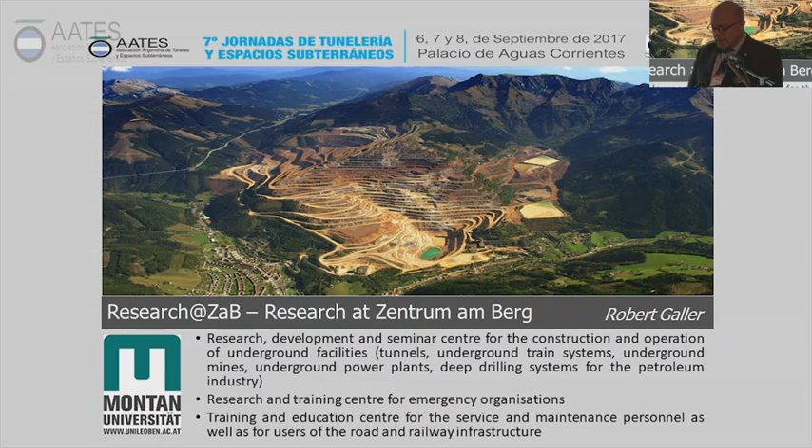But it is also a training and service center for people who are doing maintenance afterwards in tunnels, because we are also missing a device like this one. So what is the situation actually? Normally we get samples from core drillings. We try to do our best with the normal laboratory tests, UCS tests, shear tests, all the tests which we need for static calculations for designing the tunnel.

Yesterday we spoke about one step ahead, online chemical analysis for environmentally friendly tunneling, and so on is coming up. So this can be done in a laboratory, but it would be better if we could do all of that in a big scale in a real tunnel.

So the layout of this test gallery is like you see here. We have tunnels which have a length of about 400 to 500 meters, are double tubes, and get cross passages like in a real tunnel for the railway and also for the motorway. The red one is the motorway tunnel and the blue one is the railway tunnel.

What we learned, by the way, is we did some tests with our students and asked them, okay, you have an emergency now, what do you do? Because we saw some videos of how people behave in case of a real accident. And what we learned is, in case of a catastrophe, people react completely differently and most of the time wrongly.

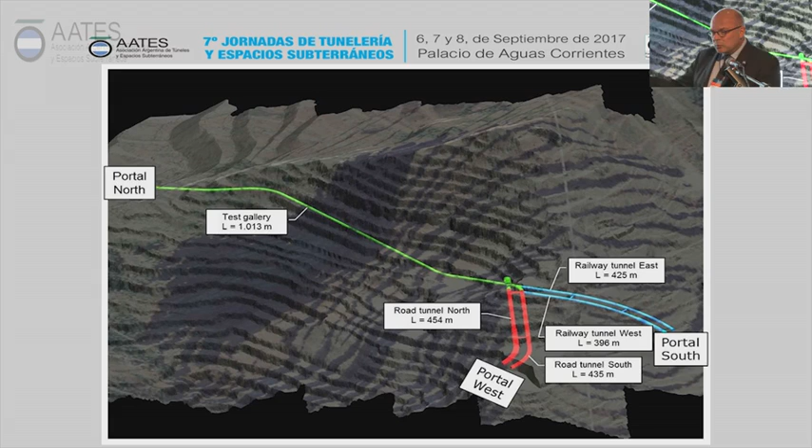Just some more detail. For this reason, we will bring the full inner lining, how it is, for a certain length on the left-hand side in the motorway tunnel, but also in the railway tunnel, so that you have the real feeling you are in a real tunnel, and what do you do then? The rest of the tunnels will be, let's say, single-lined, because we would like to do fire tests there. We would like to do material development there, all kinds of research, which I will show a little bit later.

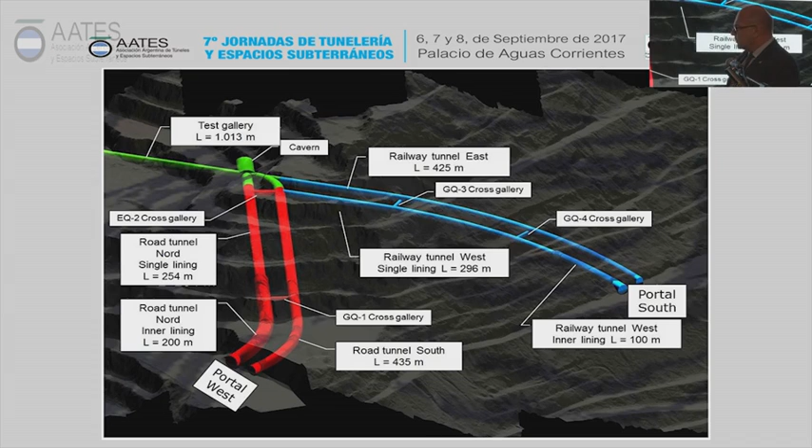So our big goal is to transfer the knowledge from the laboratory, which is, I would say, state of the art. How do we transfer this knowledge from the laboratory, what we normally got when I was a design consultant, to the big scale tunnel? Truly spoken, all of you, I think, do numerical calculations. How sure are you that your numerical calculations fit the reality?

Are there any material models for rocks available already which meet the reality? I already mentioned Mohr-Coulomb, Hoek-Brown, for London clay, Cam clay, whatever. But do these material laws meet the reality? We are far away from mechanical engineering, and we have to do a lot of research in that regard to meet the reality much more.

Following Rabcewicz's idea, having thousands of measurement results once available, then we can start to calculate tunnels. What we do before is rough estimations. I like to say 50% of what comes out of a calculation is the truth. The rest has to be found out on site by monitoring, geotechnical monitoring. And this is another point which has to be developed.

I mean, what do we do? We mount some reflectors nowadays on the lining. And then we have some distances between these measurement cross sections, and what happens in between, all of it is a guess. So we would like to get better also in that field with this training center.

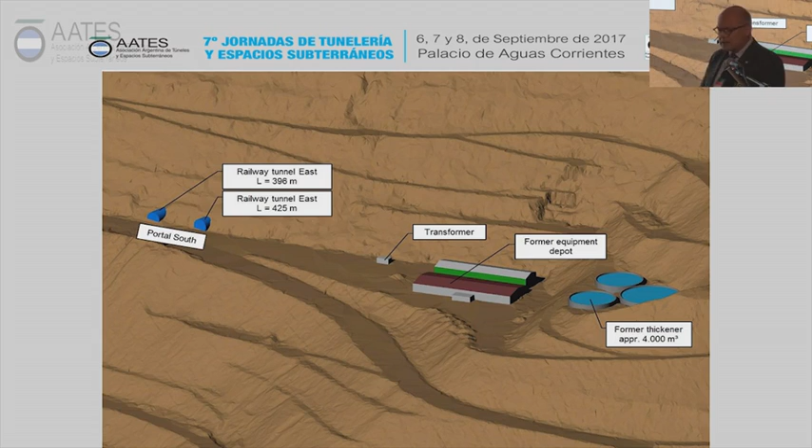Yeah, we will also set up a hall there. We have some frameworks for building segmental lining elements. Nowadays we get the segmental lining elements from the construction sites which are around us, because they are pretty big construction sites,

quite close to us, starting from tunnels which are already existing, because if we walk through these tunnels, as I mentioned, these mining areas 1,300 years old, we can learn how tunnel development was going. If you go into these tunnels, you see first they didn't use any support, then they used some wood, then the concrete came up, they built very thick concrete walls, and then at some point shotcrete was developed, then they used shotcrete, so we can follow a bit the history of tunneling in these underground structures.

The cross sections we built are, as I mentioned before, the real motorway tunnel cross sections, normally double-laned, as they are built in Europe. The left-hand tunnel gets a ceiling in between because of ventilation, which is also a research topic there. The problem our colleagues from the ventilation calculations have is the same one we have with the numerical calculation of tunnels in rock mechanics.

You can do good simulations on ventilation aspects, but we are not able to do that on a research basis in a real scale. So the ventilation guys are waiting for this infrastructure to find out if their one-dimensional, most of the time one-dimensional, ventilation calculations fit reality.

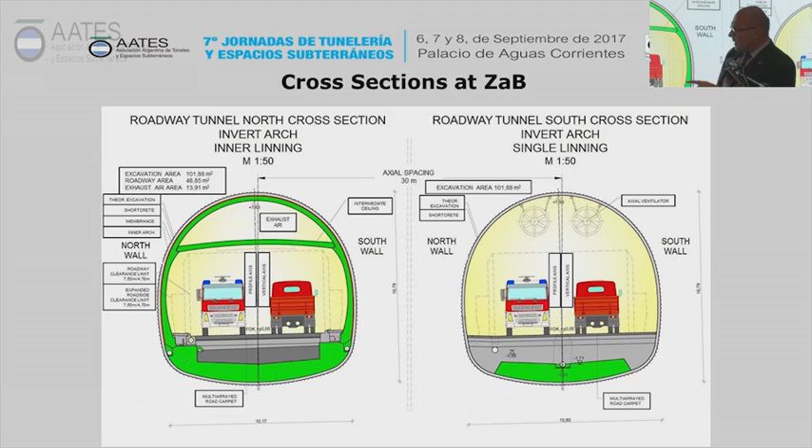On the right-hand side, we will not put in this inner lining because, as I mentioned, we will do the material tests. Yesterday we had a discussion: is shotcrete watertight? Can we get it watertight? What are the mixtures to get it? So this is the facility where we will train that too. On the left-hand side, as I mentioned already, everything will be built in like in a real tunnel.

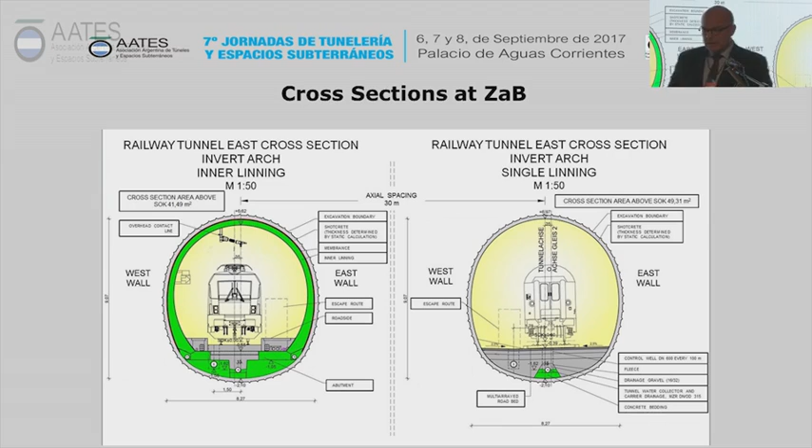Same for the railway tunnels. We are building 3 main railway tunnel projects right now, the Brenner Base, the Semmering, and the Koralm tunnel, all of them more than 20 kilometers long. This is the typical cross-section for that. The left-hand railway tunnel will get an inner lining and all the equipment, including the tracks, so that we have a real railway tunnel in there. The right-hand side will get no inner lining, to do the same trainings and fire tests in this tunnel.

Yeah, we started already. The point is, what we are missing at the universities is practical training for our students. University courses got very theoretical. There was a man 170 years before us who was the founder of the university, and he said we are working in a practical field. So we have to train our miners, at that time it was mining engineering, in the mine. He founded it in Vordernberg already, and said our lessons have to be half practical work and half theoretical. Over time we lost all this practical work, and now it's completely theoretical.

So our students get a master degree, and it could happen that they become a site manager but never did the job themselves before. We would like to change this situation. One part of our master course is, for example, surveying. How do you get the portal situation in situ, not just on a design drawing? And it's done by students. All of that work, preparation, and also the construction site management is done by the students, supervised by us

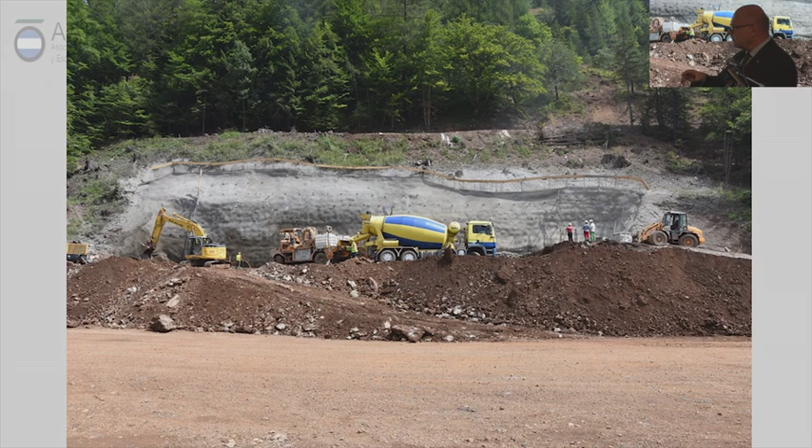and supervised by companies. The construction site manager of this tunnel site, to get the slope without sliding down, was a student of mine, who will graduate next semester. And she did it quite well. I mean, the surveying didn't fit to the millimeter; in this project, that is not necessary. But training the team, the students, how to do all these things, not just on paper but in reality, is in our opinion quite good training.

You see here the slope development and then the tunnels. The tunnels had to be placed in the right place, and everything is done by students. That's what we like about it. But as you see, it's supervised by, in this case, an Austrian company. Just a few views from the helicopter. Where are we? You see the two portal locations quite in the middle of this mountain. We are passing through the highest point of the mountain and come out on the other side.

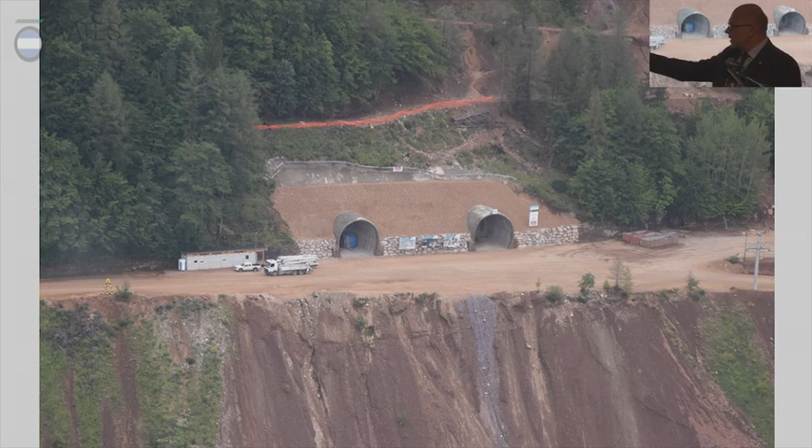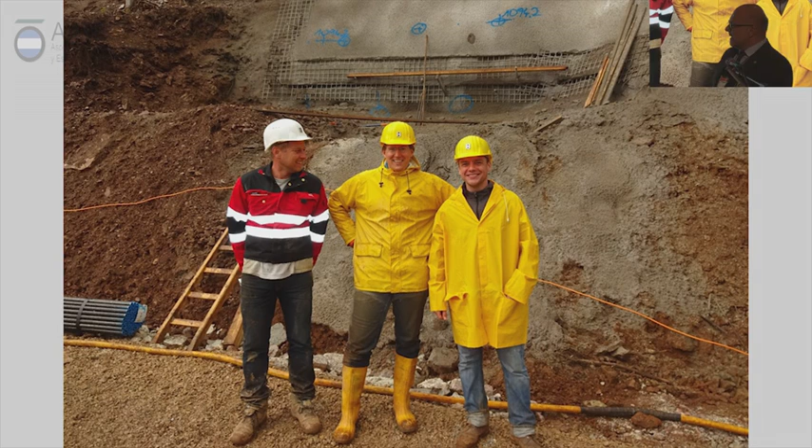This is what it looked like, let's say, half a year ago. We are now enlarging this area where we can pass into the tunnel. She was the construction site manager, and that's what I want to focus on. It's a student lab, so to say, a student education center. And you see, it's a woman; the woman was the construction site manager, and the students were the workers. I also brought just a small slide of some of them. Of course, it's a big team of students, who are then the miners.

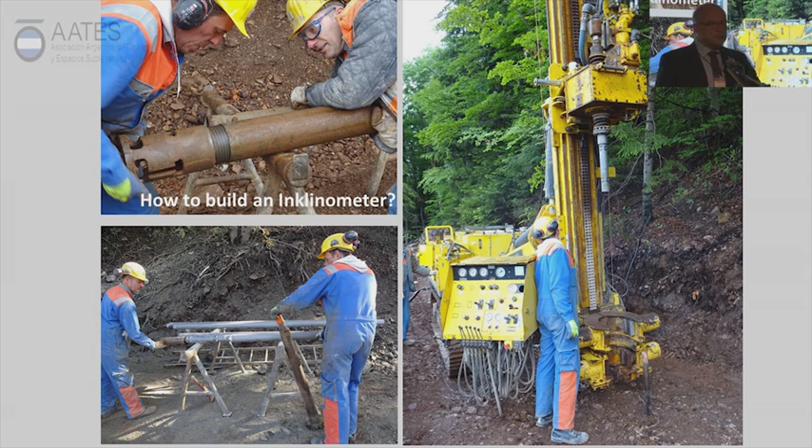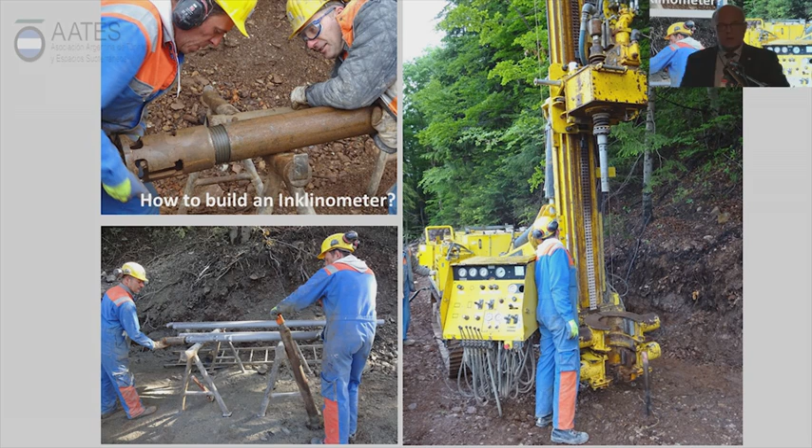Yeah, we do everything that has to be done. We are setting inclinometers, so we are training our students in the courses how to set down an inclinometer, for example. But theory and practical work is a difference. And here we are just drilling down this inclinometer, which is necessary in case of slope observation: how to bring down this inclinometer, how to operate it, how to then measure these things.

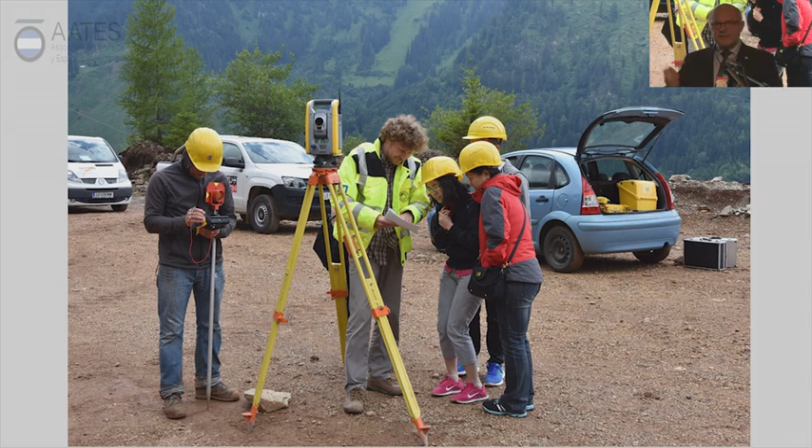Yeah, and it went quite quick that this was then known internationally, and last year we already had a course on surveying technology, how to survey tunnels and how to do geotechnical monitoring. This is a course coming from China, and we trained them in monitoring, how to operate a theodolite. I mean, it's not an innovation, it's pure basic knowledge. But if you didn't do that in your master course on a real tunnel site, it gets hard. And what we see is the construction companies don't have the time to train the young colleagues in all of these fields. And that's why they liked to come.

Then we set up the first training course for tunneling, a real tunnel training course in India, in Mumbai. I just was in India for 1 week. We started to do the theory there. And now the colleagues are coming to the research center and do all that we did for 1 week in India, now in this research center. Basic calculations, and now, okay, how to really tunnel.

And you see, all of them are a bit laughing. So my feeling is young people like to work and like to be trained in practical things in tunneling, not just in theoretical things. And we also have, as you see, colleagues from South America. One was from Peru, another from Chile, another one from Brazil. However, I just took some photos with me.

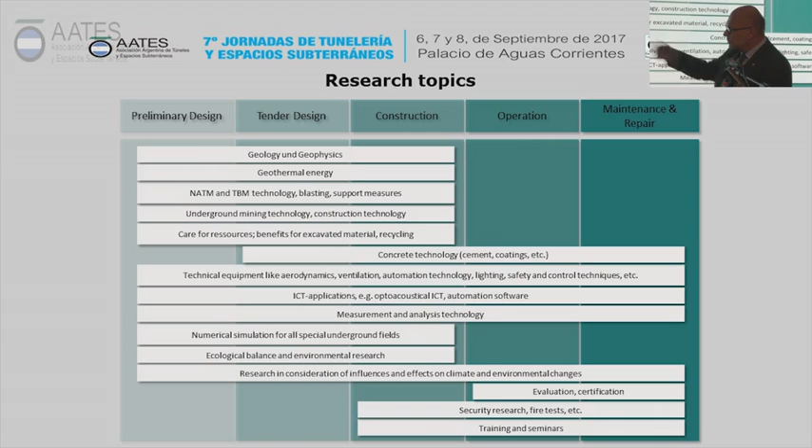Then we go to aerodynamics. All this equipment in the tunnels is changing pretty fast. And we have to develop this equipment which comes into the tunnel and find verification methods to say this is the right equipment, yes or no. And it goes down to security research, fire tests, as I mentioned before.

In parallel, we set up some laboratory tests, but at a bigger scale in between. So we have a laboratory where we train the students on normal tests like we are used to. But then we have to find a middle part, for example this laboratory device to test the segmental linings. Because up to now, we were not able to say whether the segmental lining takes this moment and this normal force. Can we replace the steel in these segmental linings by fibers? Can we do that with steel fibers? Can we do that with other fibers? We are doing tests on that.

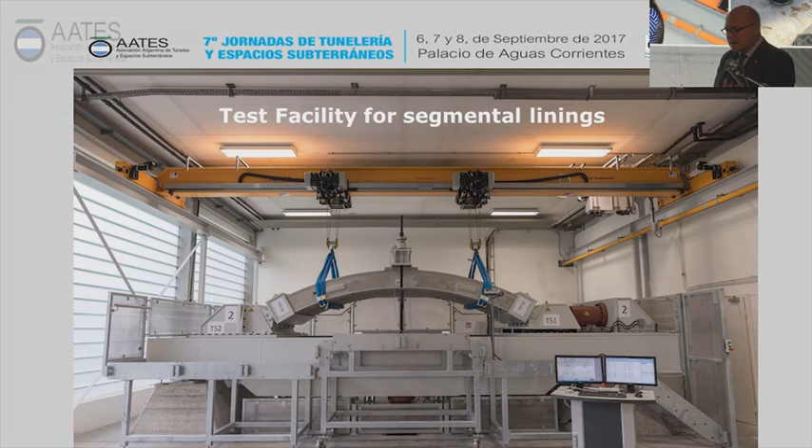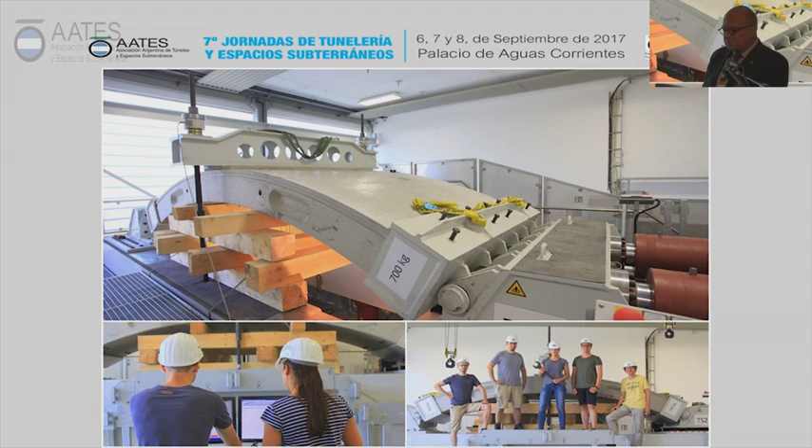It's just a single element test. It doesn't say that the full ring is then really working, because the backfilling is very essential, and we have to find that out in another place, outside in the research center. Here, in the laboratory, in this big scale test, we can find out what is the safety limit of the carrier, what load we can take in moment and normal force terms, but not on the full ring. So these are tests done in this second laboratory.

And then we brought some segmental linings to the research center already, where we will start right now to test the backfilling of these segmental linings. There are different possibilities how to backfill, and we are not sure. I would say we have a list of at least 20 open questions for the backfilling. Is the backfilling also working in 10 years? Yesterday we were speaking about sustainability.

If the trains are running at, let's say, 250 kilometers, we fill it back with pea gravel, and every train brings a vibration into the tunnel. Do we then know exactly that after 10 years the tunnel is still stable? So we are working on backfilling strategies, but also on monitoring of the full ring to get the deformation of the rings and the load in the rings.

In parallel, we have a seminar center there, so what is trained outside can then be discussed with the groups at this research center. What we learned is also that the military has quite a lot of questions about underground things, and this is a delegation of the Austrian military forces having a look at it to fix what trainings are to be done in this underground center.

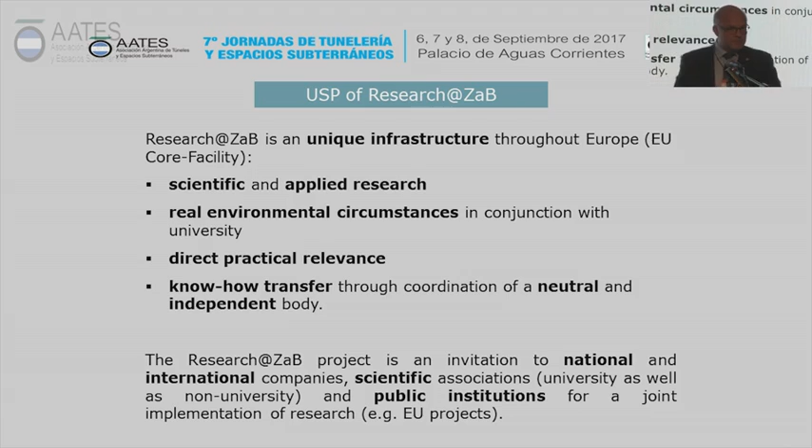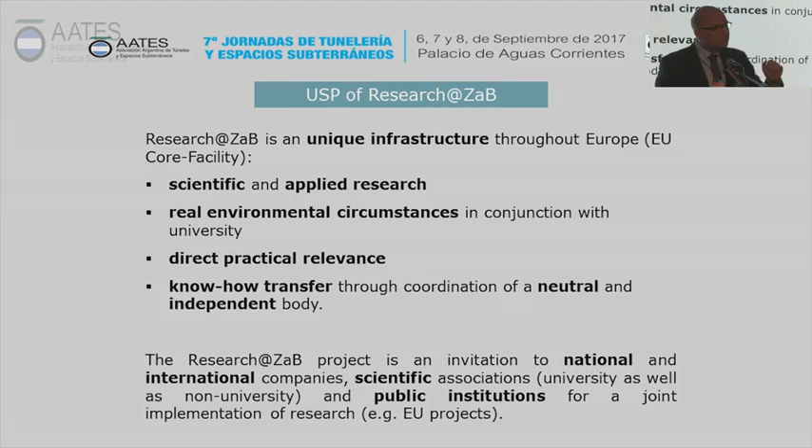For us it's quite unique. We are completely independent, as we are a university building. We are an independent body. We are not paid by any company. We didn't want that. We said we will start if the government gives the okay for the finance. So it's completely independent. We are trying to do scientific work there, applied research with a real environment and practical relevance, and we would like to do know-how transfer from theory to the practical world. This is the big goal.

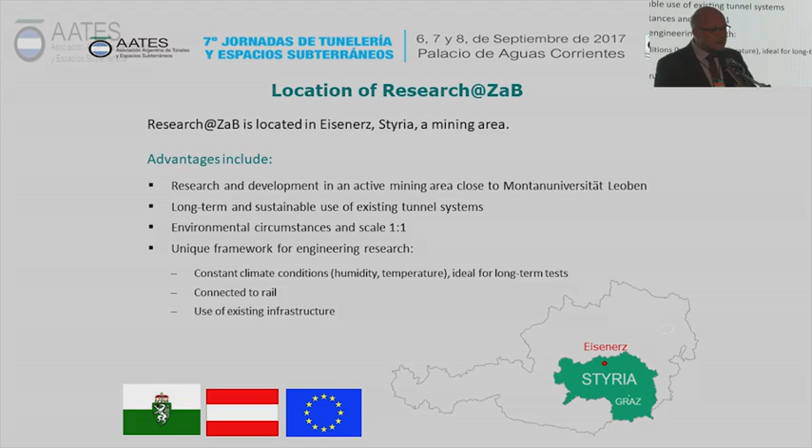Just to show where it is, on the picture down there you see the map of Austria. Yesterday, the taxi driver explained how many people are living in Argentina, so we are pretty small. In the place where this research center is, we have 4,000 inhabitants, so it's a pretty small village. It's placed in Eisenerz, in Styria, in the middle of Austria, in between the three universities which I mentioned before.

What we hope is that we can at least exchange researchers. We just had a talk with Rodriguez from Bolivia before. Maybe we can bring some colleagues from South America to this research center. There are so many universities; we hope to attract researchers to come to such a facility to really train on a real scale, to attract research in this field, and of course also academically educated personnel in the area of underground mining and tunneling. We hope to attract students.

The problem is, I don't know the South American situation, but technical studies in Europe are going down. Everybody in Europe, I would say, would like to become a lawyer, a medical doctor, or do something in economics, but very few are interested in the technical field. So we would like to see more students in the technical field, also more international students, like before, when, for example, Rodriguez was in Austria as a Bolivian colleague.

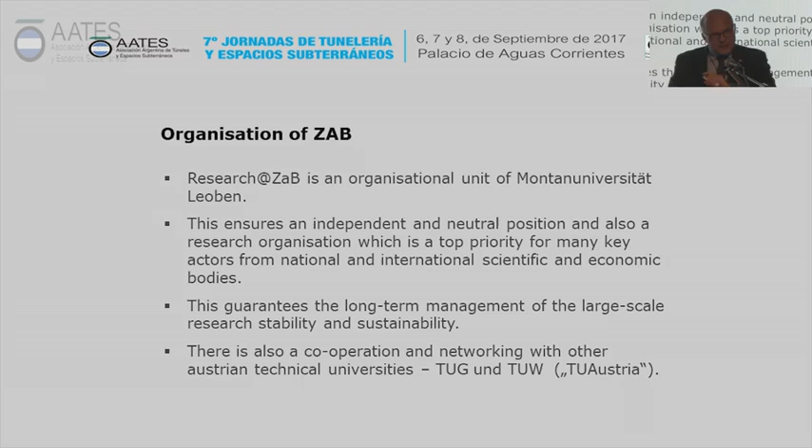We would like to train service and maintenance staff. Of course, we would like to cooperate with companies if there's a good basis for it. Users, as I mentioned already, for road and rail infrastructure, and also customers from industry. The organization is, I would say, a simple one. It's university-based. There's no company behind it. So it's like working with a university. It's not a laboratory building, but tunnels which are to be used for research. This is how we think we ensure the independent research which can be done there.